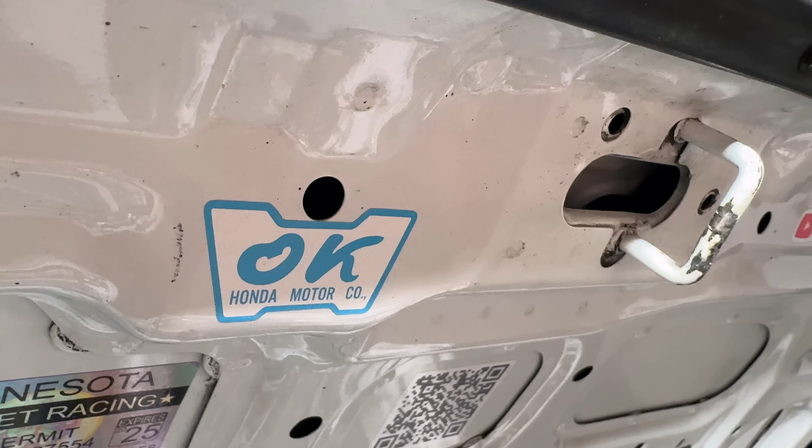If you've ever wondered what goes into building an all-wheel drive, K-swapped Civic, you've come to the right place. By the end of this heavily scripted video, you'll have all the specs, a full rundown of the work required to get it where it is today, and some of the things I've learned along the way. Plus, if you stick around to the end, I'll be pulling out the dyno graph, the corner balance results, and even a 60-second overview of the build sheet with all the juicy details. But first, let's dive right into this with a walk around.

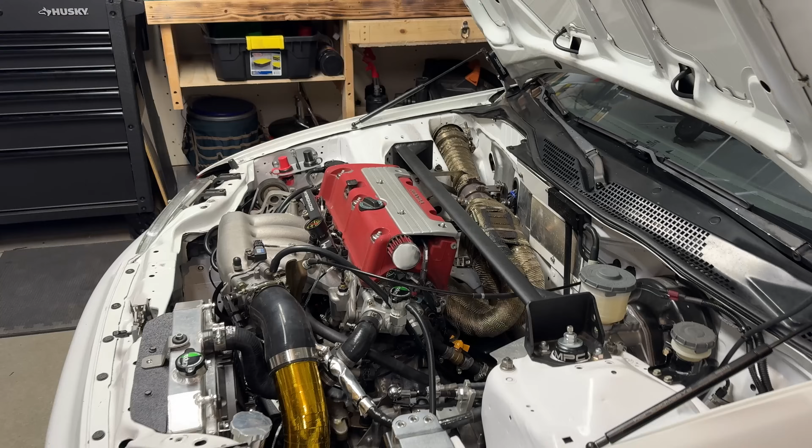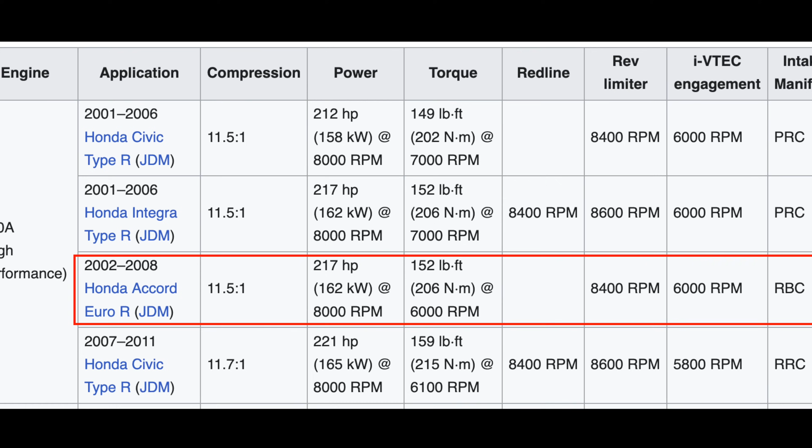This is a low-mileage JDM K20A imported from Japan by the well-known Honda importer HMO, who I'm sure most of you have heard of. This engine is found in the Honda Accord Euro R, otherwise known as the CL7, and produces 217 horsepower and 152 pound-feet of torque from the factory, which is just barely enough to torque the lug nuts on my truck. It's a stock block, top to bottom, nothing done to it other than regular maintenance, and I gotta say, when she gets up past 8,000 RPM, it's glorious.

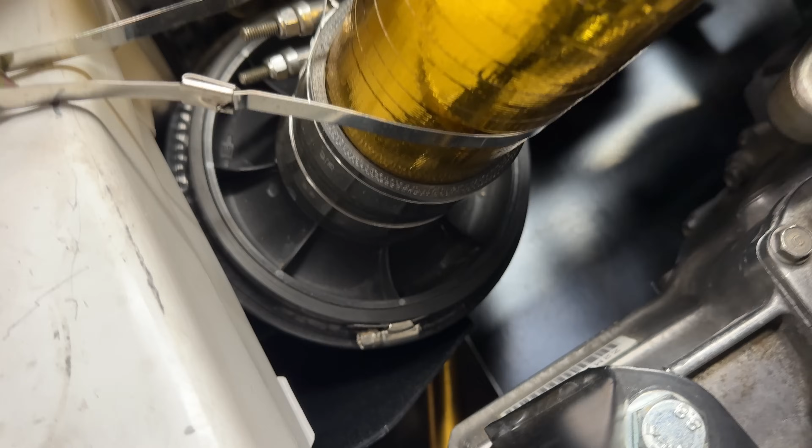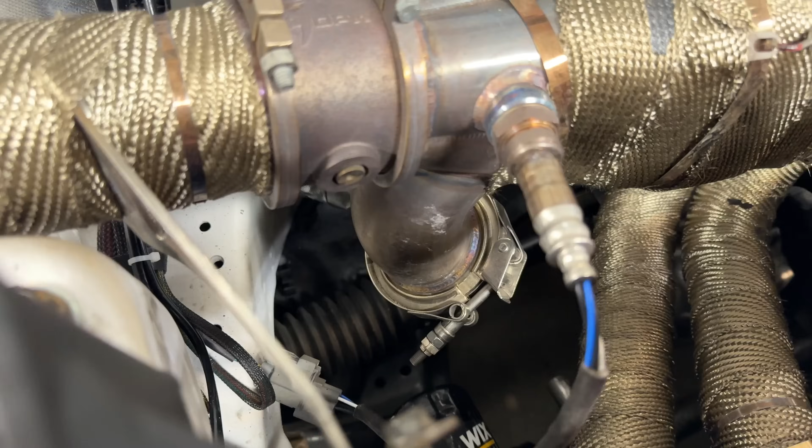Bolt-ons include a custom cold air intake I made out of 3-inch aluminum pipe, heat wrapped and capped off by a Blox 7-inch cone filter with a velocity stack. Exhaust is a Myers competition header, modified with a wireless control valve that tees off at the valve, which will eventually run under the car to a full exhaust. For now, it's straight out the fender, loud and proud. I did add a muffler insert to the dump pipe to take the edge off a little, but it's about as effective as a suppressor on a 50 cal, so there's that.

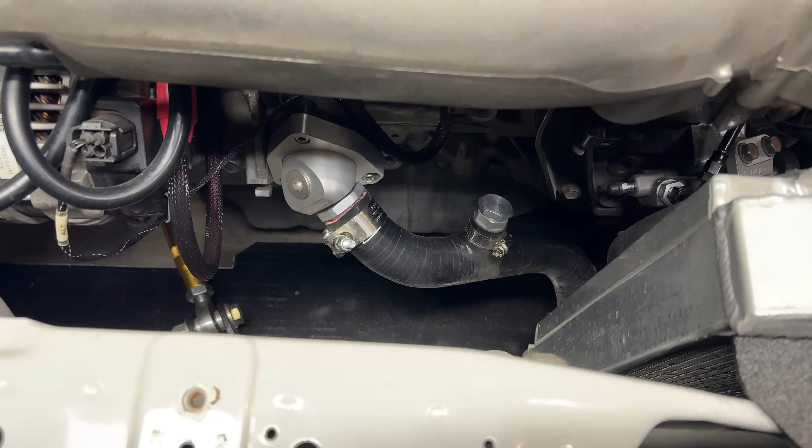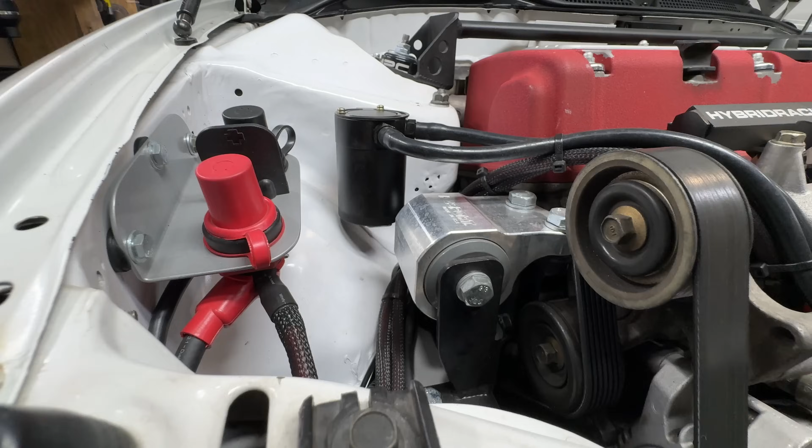For cooling, a K-tuned upper coolant housing and swivel thermostat, an old Yonaka half radiator with a SPAL fan and radium caps. I wired in a manual override switch for the fan for track days, which I'll show you when we get to the interior. It gets a little hot because I drive like a maniac, so I've got some cooling upgrades planned, but we'll get to that some other time. Other than that, I've got a basic catch can, hybrid racing center feed fuel rail and fuel pressure regulator, and stock injectors. But I'll get to the fuel system in a few minutes because there's a lot more to it you'll probably want to see.

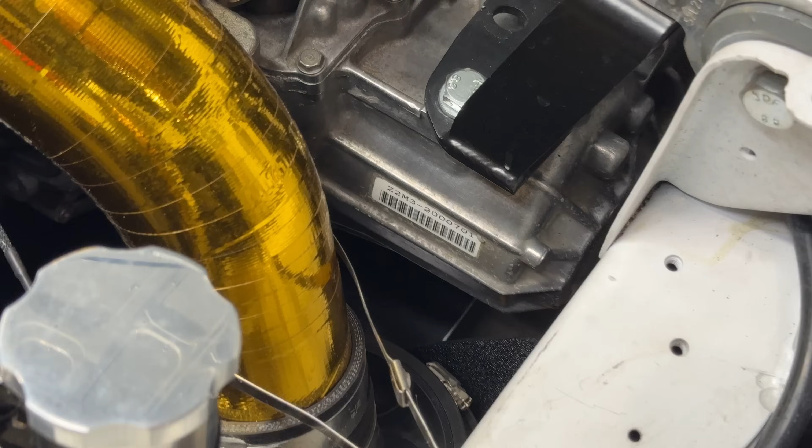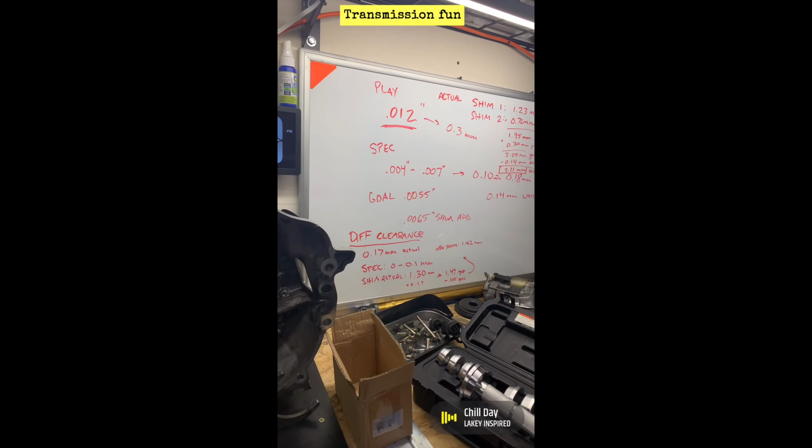Let's move on to the transmission. Just like the engine, the trans came from Japan, courtesy of HMO. It's a 5-speed CRV unit that I've done a little work to. It's been refreshed with new bearings and seals all around, Honda fluid, a Wavetrac LSD, and stiffer Speed Factory detent springs to help give me those nice, crispy shifts. Finally, it's got a stage 2 clutch and lightened flywheel from Competition Clutch to put the power down. That rounds out the engine bay for now, so we'll move on down under the car to the drive line and check out the all-wheel drive system.

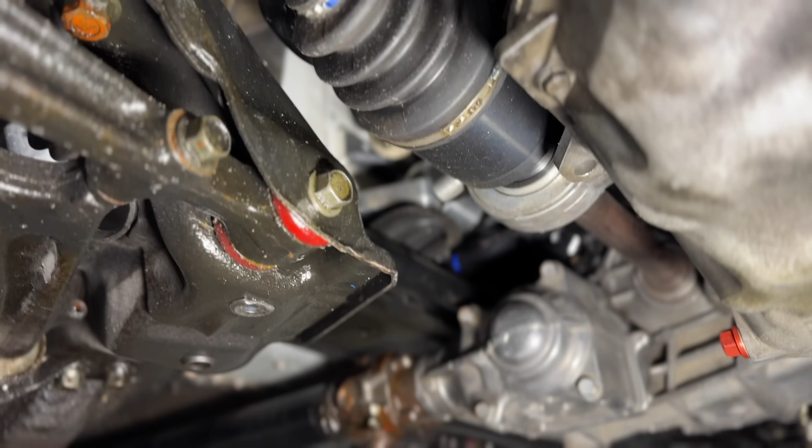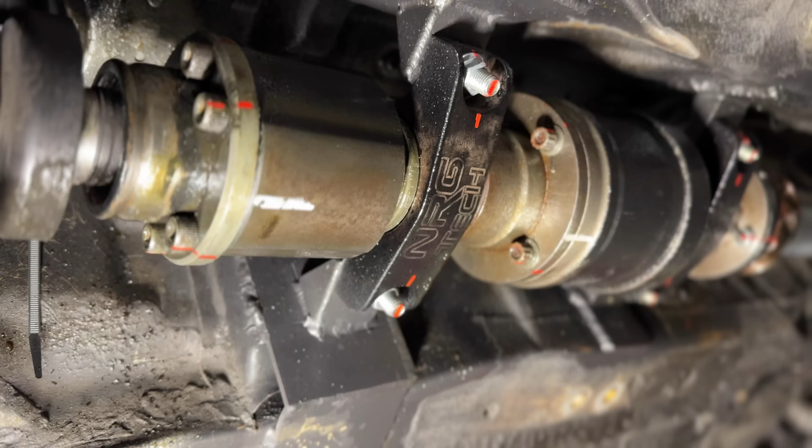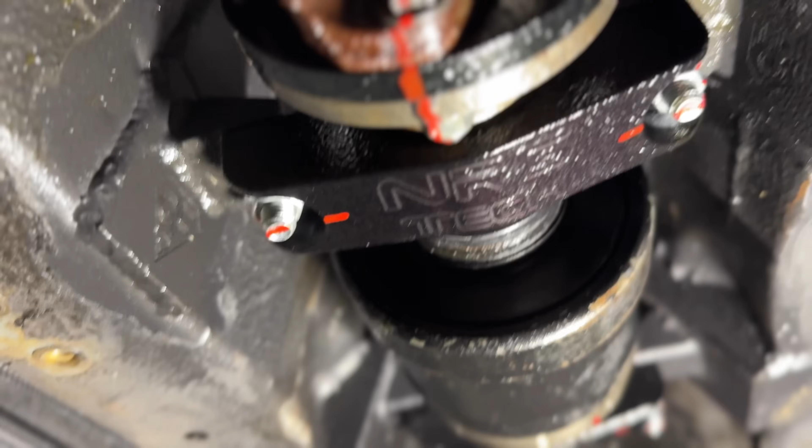Under the car, coming from the factory transfer case, we've got the front drive shaft with the slip yoke from a Civic wagon, which has just been shortened, upgraded to 1310 U-joints, and rebalanced. The viscous coupler is also from a Wagovan, rebuilt with 60K fluid by Trust Fab because who else? Viscous coupler mounts are a little unique. We've got Diamond Eye Fab weld-in brackets paired with NRG Tech mini mounts. I went that route because I wanted easy access for future maintenance. It's low profile, 4 bolts, and uses factory viscous coupler bearings. Looking back, I'd probably just do the S1 built mounting setup for cost effectiveness, but this works just as well.

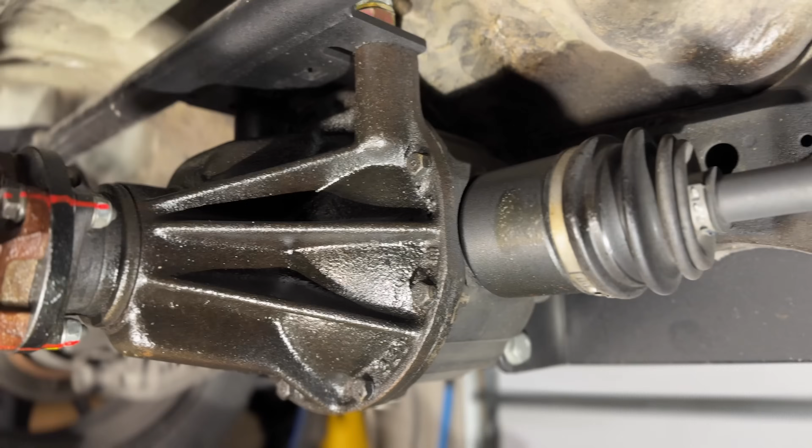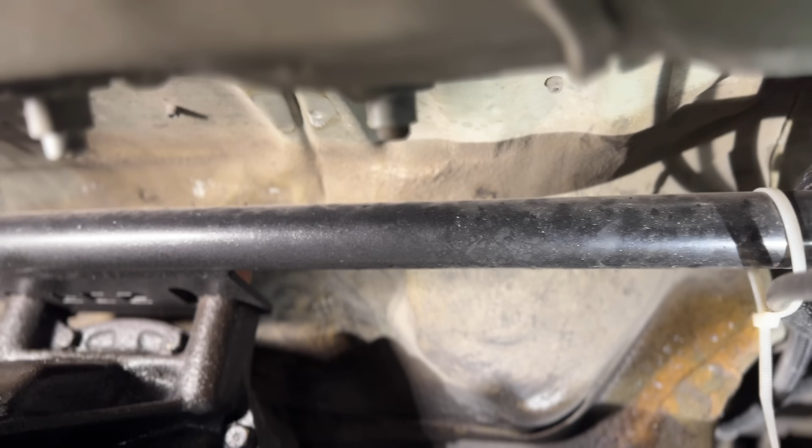The rear drive shaft was built from scratch with the same treatment as the front, 1310 U-joints, and a balance. It was just cheaper to build one new than modify the old wagon rear shaft. That brings us to the rear diff, which is a stock Wagovan unit, open diff, unmolested other than new fluid. It's mounted with the FCS Racing diff mount, which I chose because it was possibly the only true bolt-in solution on the market back in 2019, and I wanted to install it myself. I was pretty meticulous with the measurements and the riv nuts, and it's held up great, no complaints. The rear brace bolts did back out a little on me once, which isn't surprising considering how I drive the car.

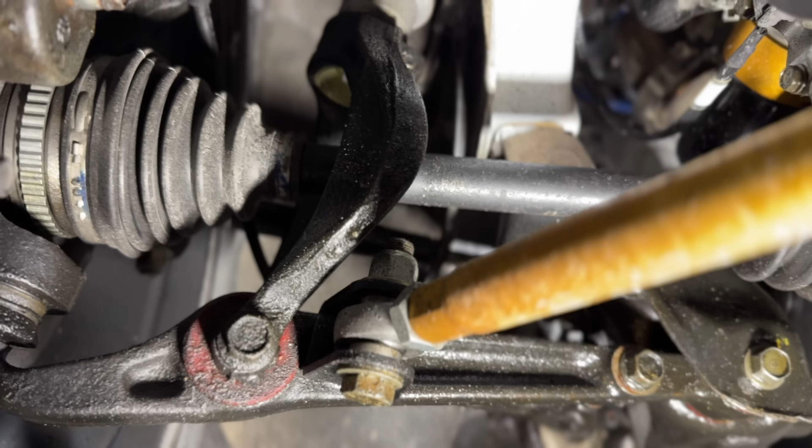So now I just use Loctite and don't have any issues. The axles are Insane Shafts 500 horsepower units on all 4 corners. For the rear trailing arms, we've got S1 Built Alpha 6 arms, which are awesome.

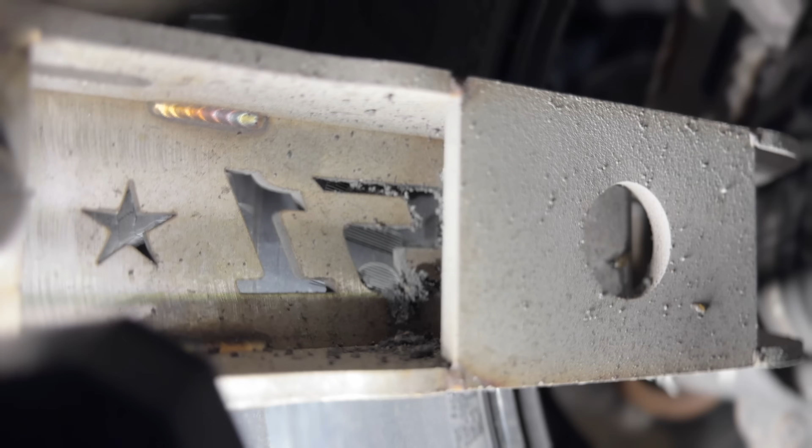I may throw on a 5mm spacer though whenever I put a new set of summer tires on, because 225s do scrape a tad on the inside. You can see some rubber there on the arms.

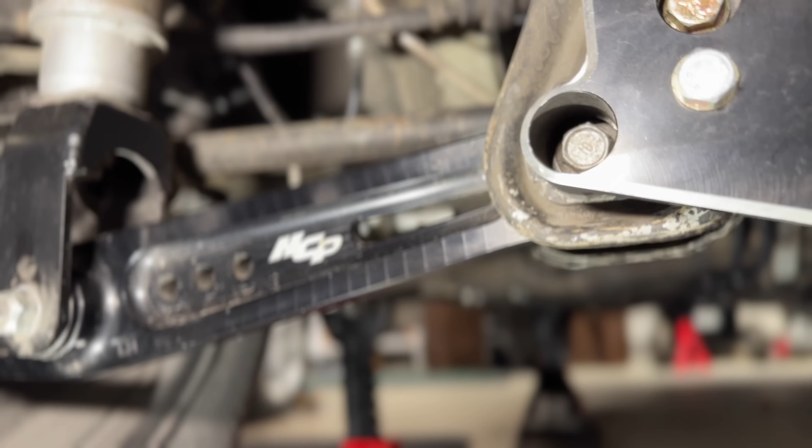Next on the list is suspension. Starting from the rear end, we've got PCI toe links, eBay camber adjusters, and HCP lower control arms. I kind of mixed and matched the all-wheel drive components back here based on the look I wanted, because I wanted to stick with the black theme for most of the parts.

Keep in mind, I started the all-wheel drive conversion in 2019 when the aftermarket support was still brand new for all-wheel drive swaps, so I was shopping around for a couple years as new parts were coming out. I had to modify the lower control arms a little bit to work with the S1 arms, but it's worked just fine. Coilovers are Progress CS3s with adjustable dampening.

Spring rates are 450 pounds per inch in the front and 550 in the rear. That's equivalent to an 8K 10K split front to rear in metric units, which is firm but very streetable. I could definitely go stiffer, especially in the rear, but this was the recommended starting point by the guys at Progress for my specific setup and use case.

The car handles pretty neutral and predictable in my opinion, tending toward understeer when the front tires get hot and squishy. There's just so much tire in the rear, I think I'm going to have to go full hard back there to get it to rotate more.

If I could use a skinnier tire in the rear, I would, but there are almost no performance options in a 205/55 profile, which is what I would need to use to maintain the same tire circumference as the front. So the solution will have to be suspension and differential related.

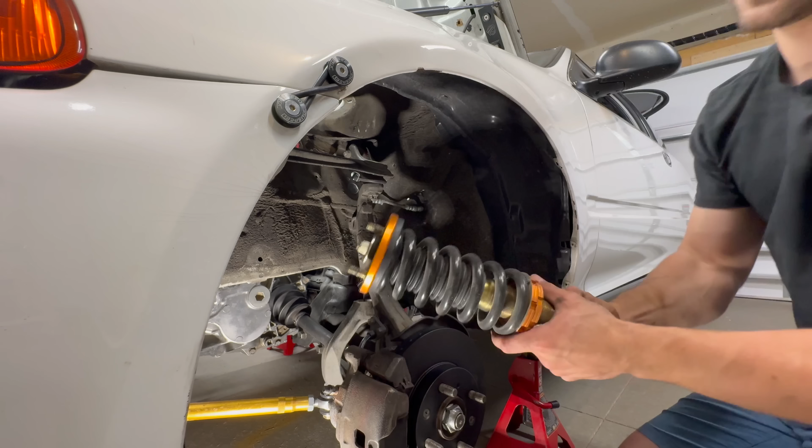My other main theory, speaking of differentials, is that the open rear diff isn't pushing me through the corners when the inside rear wheel lifts, and that's causing some understeer. I prefer a lot of oversteer, so I'll be testing different spring rates on the track eventually.

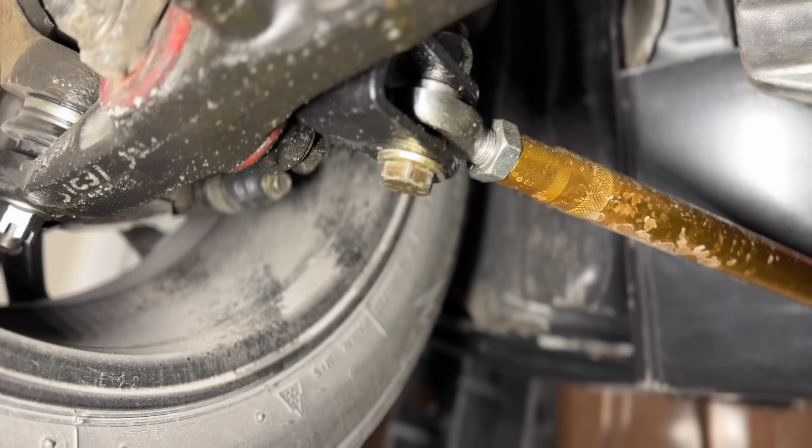No one I know of really road races all-wheel drive Civics. Everyone seems to be straight line drag strip focused, so there's not a lot of data out there yet about current setups. Up front, I've got Spoon extended ball joints, PCI adjustable outer tie rods, Full Race traction bars, and good old factory upper control arms.

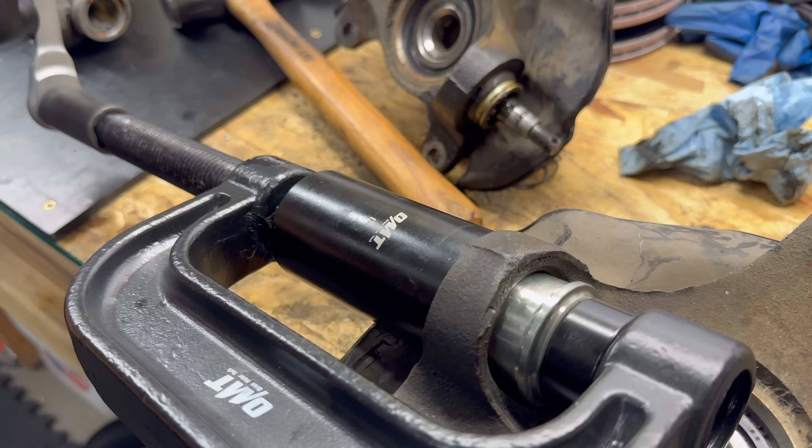I replaced the manual steering rack guts with a Quaife unit for a quicker ratio, which definitely improved the feel on the track. I did a whole video on that, so check that out here if you're curious.

I've been experimenting with different pads, but currently for the winter we've got Dynamic Friction Street Performance pads up front and Hawk HPS pads on the rear that just never seem to wear out. I've got DTC 60s for when track season starts up again, so I'm looking forward to using those.

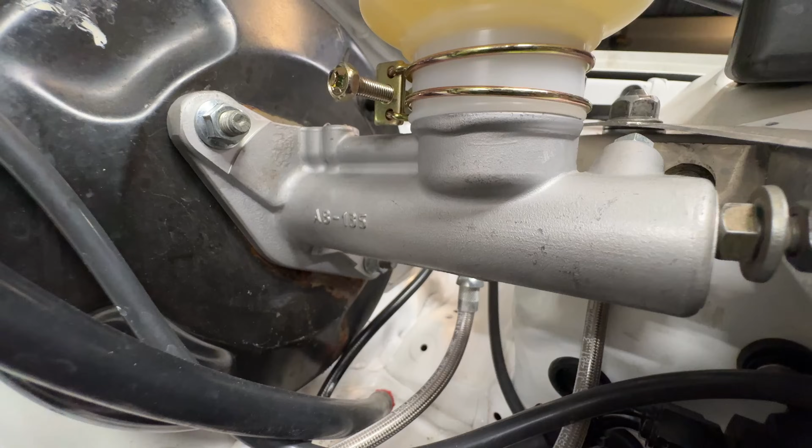There are no factory brake lines on this car. They've all been replaced with a full tuck braided line kit from Finishing Lines, which I really like. It simplified the whole system and really cleaned up the look in the engine bay and under the car.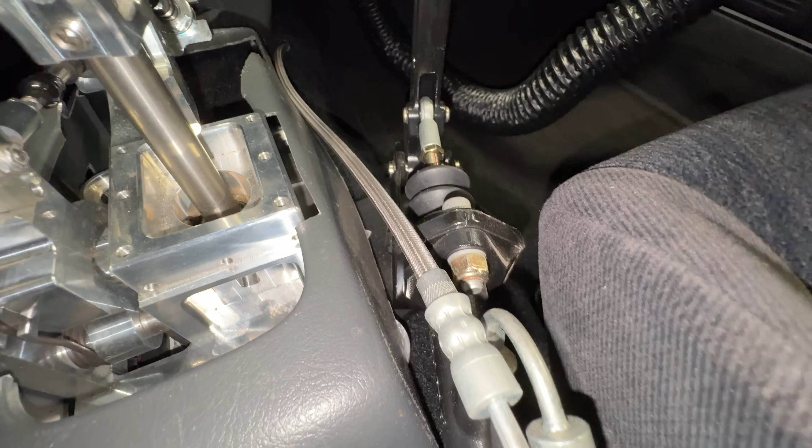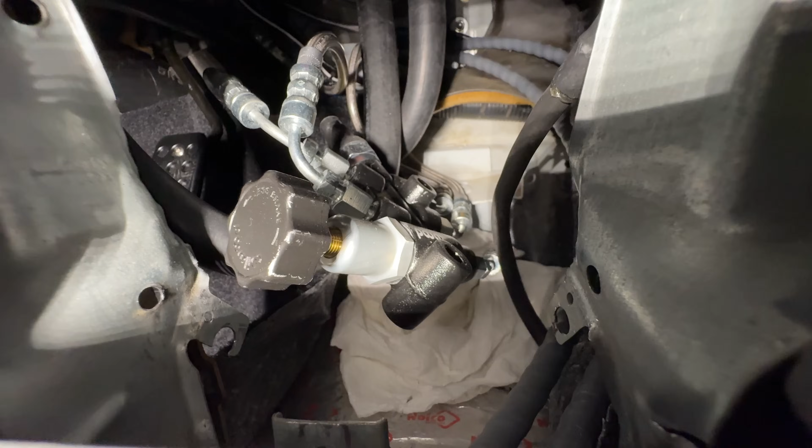I was running a factory 3030 prop valve until just recently when I started having awful brake performance on the track, and I couldn't even lock up the brakes. Turns out it was leaking internally, so I scrapped it and installed a Wilwood adjustable valve. The difference was just night and day, and now it stops like it should.

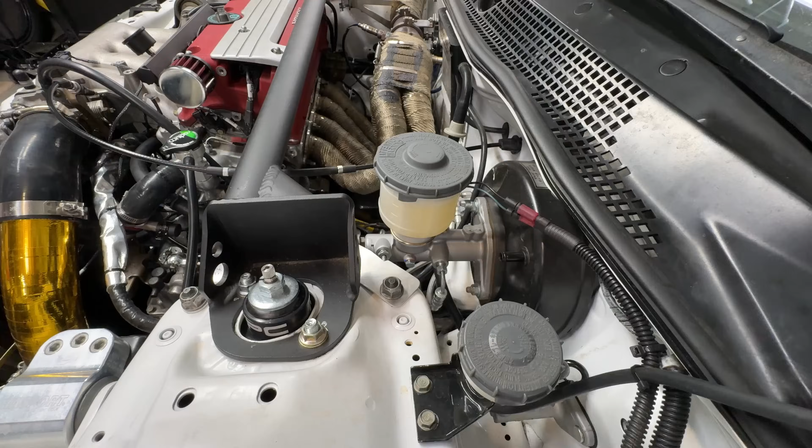I'm running with the brake booster disconnected because I like the feel of manual brakes, and it also counts as leg day if I'm at the track, so there's that. Running a bigger 15/16 master cylinder as well, which shortens the pedal travel, which I also prefer.

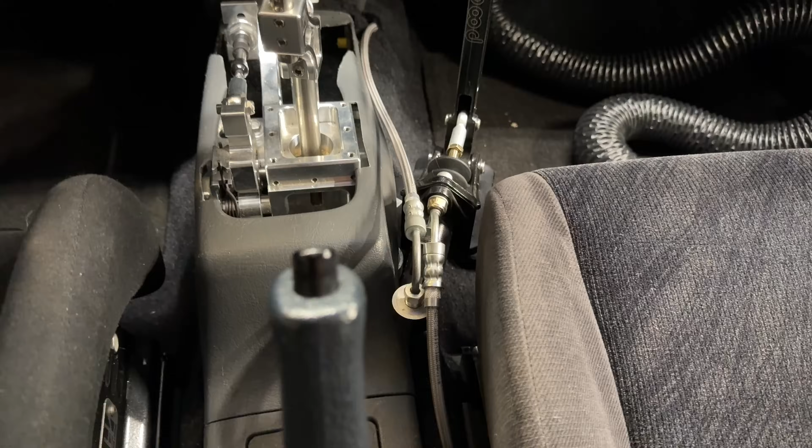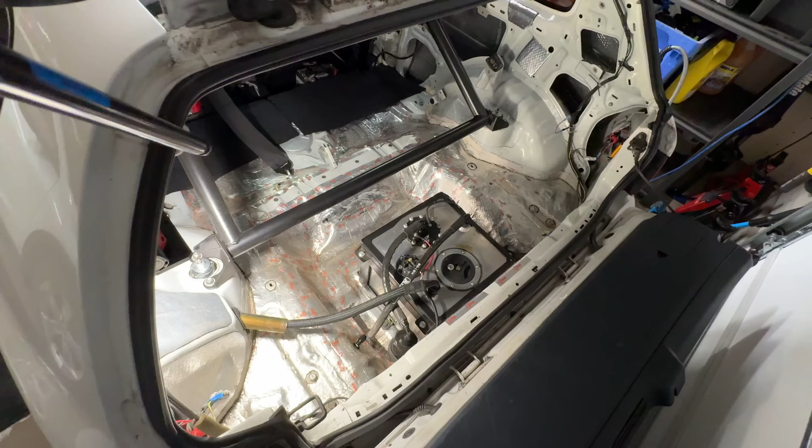I've plumbed in an inline hydro staging brake, which just holds the rear brakes. Not strictly necessary, but I like it for launching, and it comes in handy on the street sometimes when you stop on a hill. Let's pop the trunk and check out the fuel situation that I mentioned earlier. So back here we've got an Aeromotive 6-gallon fuel cell and its corresponding mounting bracket, which was not cheap.

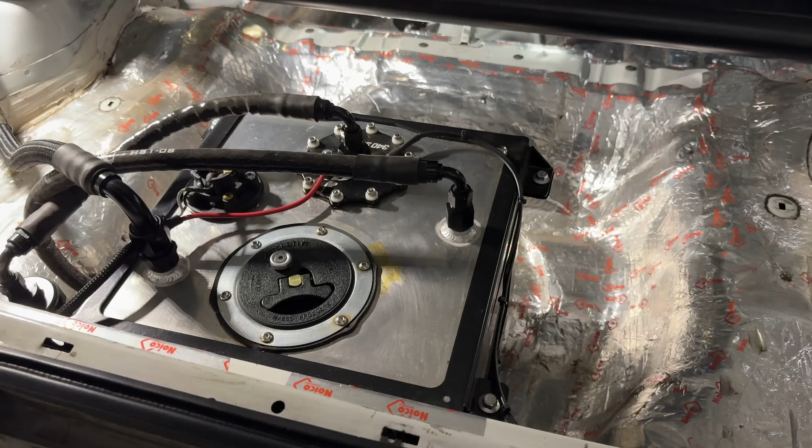But again, I don't have a welder, so I wanted a clean bolt-in option, and this was the best I could find. It's got an in-tank 340 stealth pump, which is really just stealthy enough to let you know you're in a race car without being annoying. I added a generic fuel level sending unit after the fact, which was the closest one I could find to being the correct height for this cell.

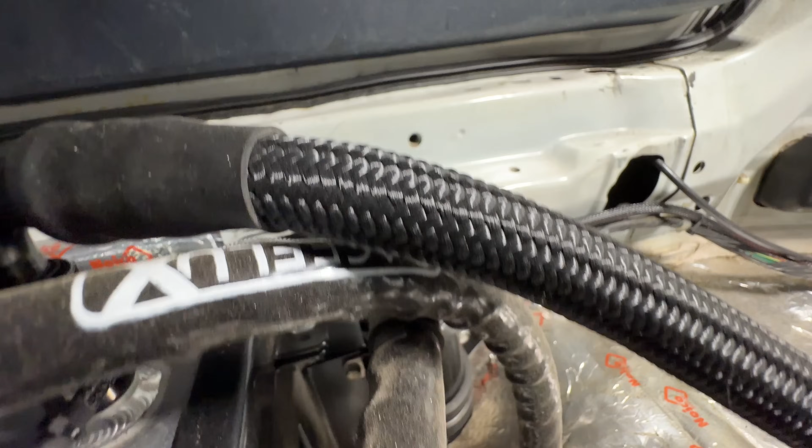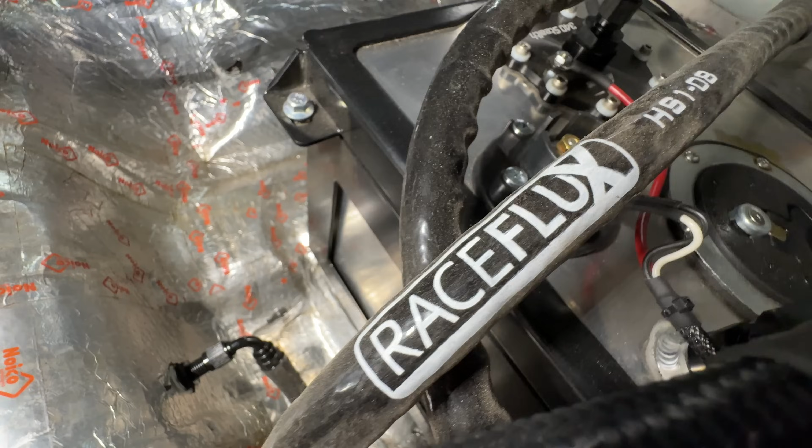We've got a Fuel Lab inline filter as a backup to the in-tank sock filter on the pump. All the fuel lines were custom made by a company called Raceflux. I planned how I wanted the lines run, mocked it up with rope, measured everything, then built the hoses online with their custom hose builder tool, which is really slick. It lets you choose a type of hose, length, type of fitting at each end, and whether you want a fire sleeve and shrink tubing. Highly recommend if you need custom hoses. It's one of the few pieces of this build that fit perfectly without having to make any modifications.

I do still have to pop the trunk to fill the cell, but now S1 Built makes a kit that uses the factory fill location, so eventually I'd like to convert to that. You're probably thinking 6 gallons sounds pretty small, and I agree, but it actually works just fine for what I use the car for. I don't daily this, I don't road trip it, I never really go more than an hour to an hour and a half away from home for car shows or meets, so it works just fine.

On track days, I take an extra 5-gallon gas can with me and I can run laps all day and drive 45 minutes home, no problem. I can usually get about 120 miles of range out of this cell on the street before I start getting nervous.

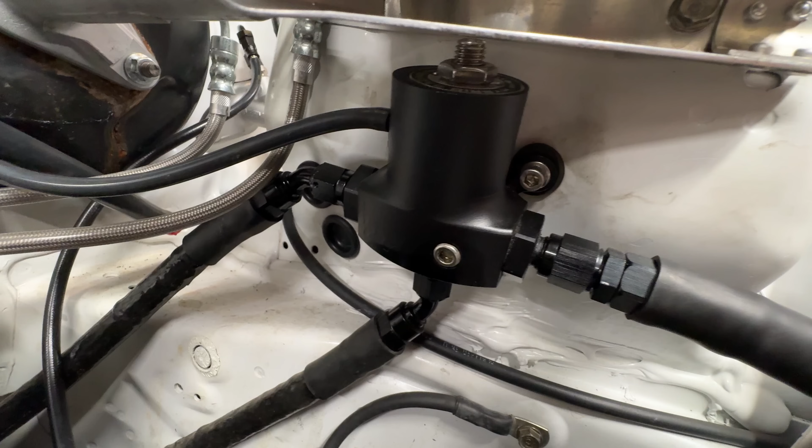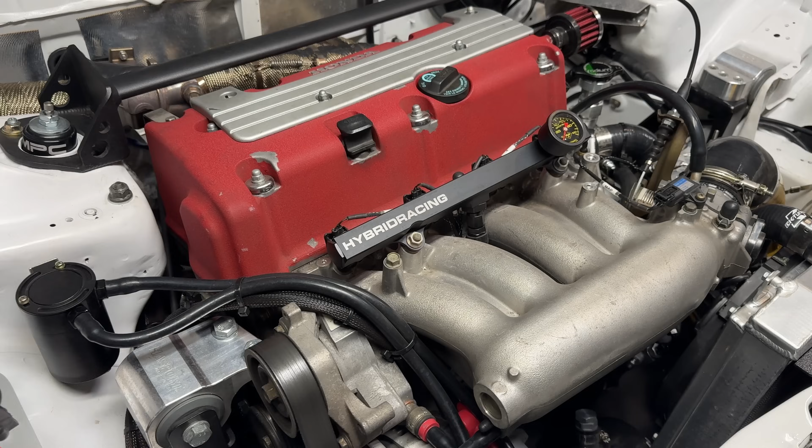The fuel pressure regulator is a piston-style unit from Hybrid Racing, as I mentioned before, and I run a deadhead configuration to the fuel rail, which just means the feed line dead ends at the fuel rail, and the return line comes off the regulator where it's mounted on the shock tower, instead of mounting on the fuel rail. No advantage there other than packaging and looking really clean. I just didn't want a fuel line running around the belt side of the engine since that would have complicated the routing and used longer lines. The way it is now uses the shortest possible fuel lines.

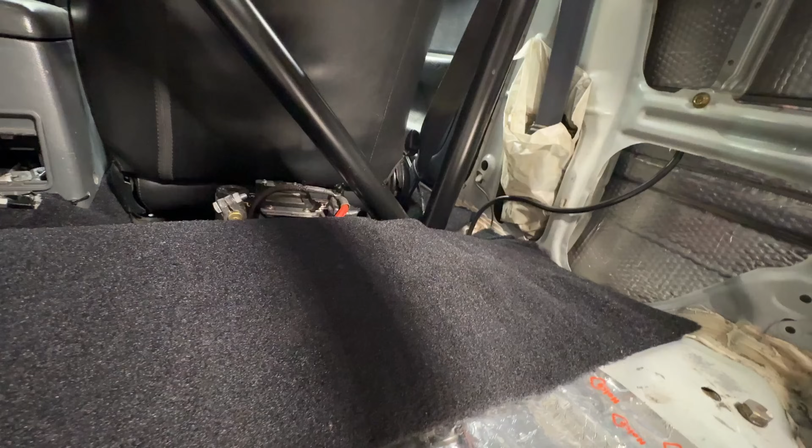Okay, let's check out the interior. So the first thing that probably stands out is this roll bar, which is from Eimer Engineering. There are really only 2 mainstream options for bolt-in roll cages for this chassis, and those are Cusco and Autopower. But I didn't really like either of their available options. This is a 4-point bar, powder coated in a semi-matte black finish, which they let you choose from a whole catalog. I did a whole install video on this too, so go check that out if you're interested in what it took to install. It was a little tricky. I also added a little fire extinguisher here just in case things get too rowdy out on the track.

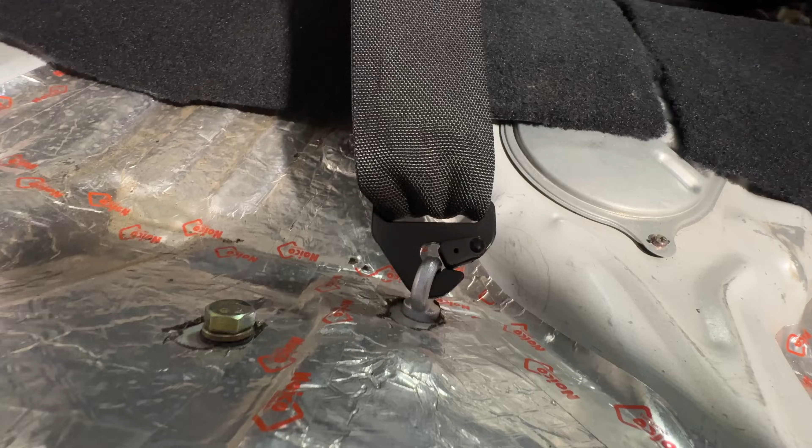The seat is a Sparco Grid Q on a PCI slider mount with a Sparco FIA 4-point competition harness. It took a little finagling to figure out the harness mounting on the center console side of the seat because there's no room over there to mount a ring to clip the harness onto. So I customized that side of the lap belt to use a bolt-in bracket instead of the clip-in style.

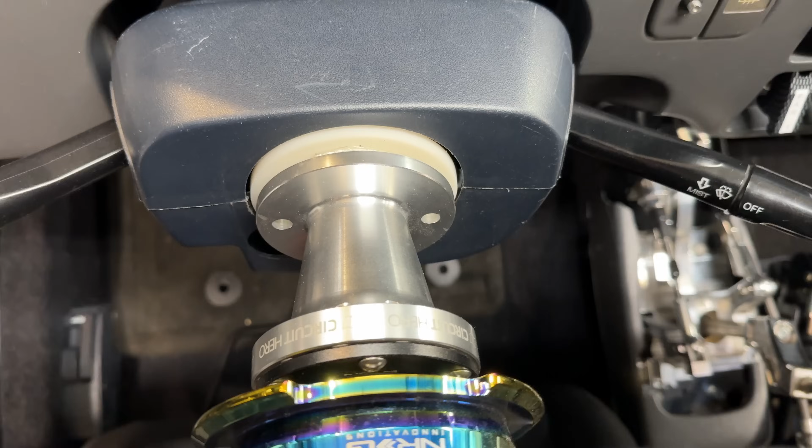Sticking with the Sparco theme, we've got quite literally the very first upgrade I ever did to this car, which is the Sparco R383 steering wheel, which I still love. It's on an NRG Shorty quick release in neochrome with matching neochrome mounting screws because that's what I wanted back in 2015 when I didn't know anything about cars.

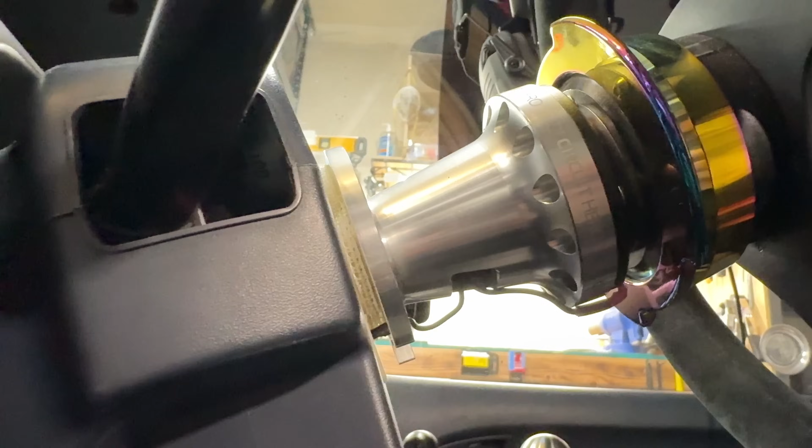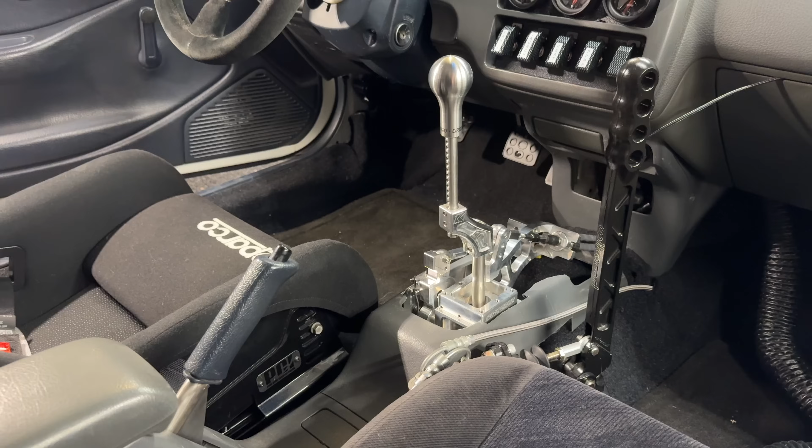I recently added a Circuit Hero steering wheel extension to bring the wheel in closer to me, which makes tracking the car way easier and has the added benefit of allowing me to see my gauge cluster again. Over in the middle here, we've got the K-tuned billet shifter and cables. I've seen a lot of mixed reviews from people on these, but I spent a lot of time adjusting this to get it just right, and I absolutely love it.

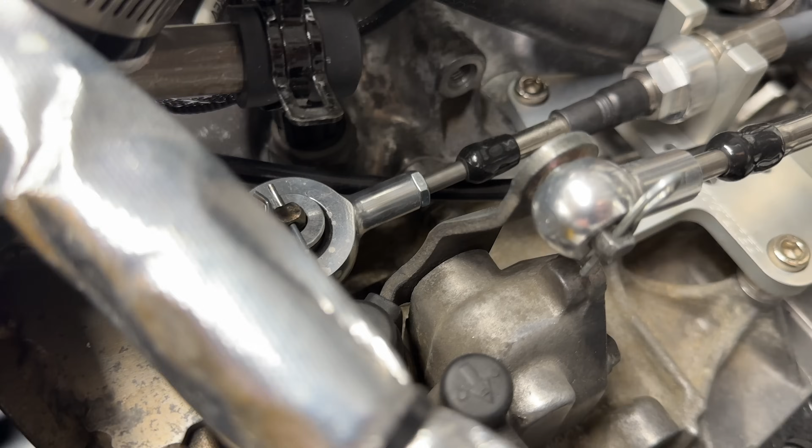I've got it set to the shortest throw setting, and combined with the stiffer detent springs, it just feels so rock solid and crispy. I was missing some shifts at the track every once in a while with the old Mugen shift knob I had, so I swapped in a Circuit Hero weighted knob and it changed my life. It's really the perfect combo right now in my opinion.

For gauges, I made a custom mount panel from 1/8" ABS plastic and added coolant temp, oil pressure, and fuel level gauges from GlowShift. The factory fuel gauge on the dash just isn't accurate enough with the aftermarket fuel sending unit, and when you only have 6 gallons in the tank, you kinda need it to be accurate.

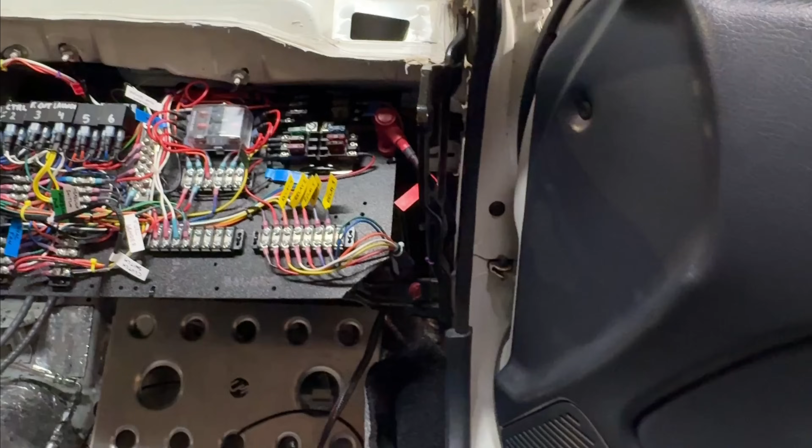Rounding out the interior, we've got this custom switch panel I made. Each switch controls a dedicated relay that I wired to a custom electrical panel I made and installed behind the glove box. Obviously, the radio and HVAC controls have been removed, along with the factory heater core and blower, which took up the whole space under the dash and never got used anyway.

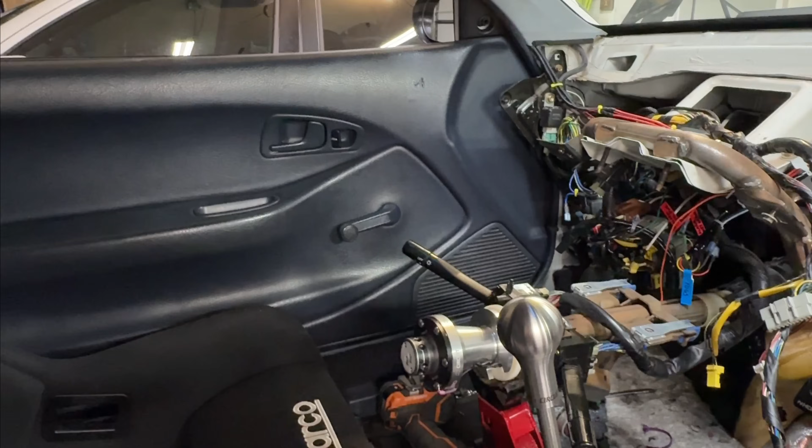I've since added an aftermarket heater core with a SPAL fan and run some flex tubing to the factory dash air inlets, so I can run the car in the winter and have defrost and some heat. I did this because I recently started ice racing. It's a super simple system that hardly takes up any space and weighs a lot less than the factory system.

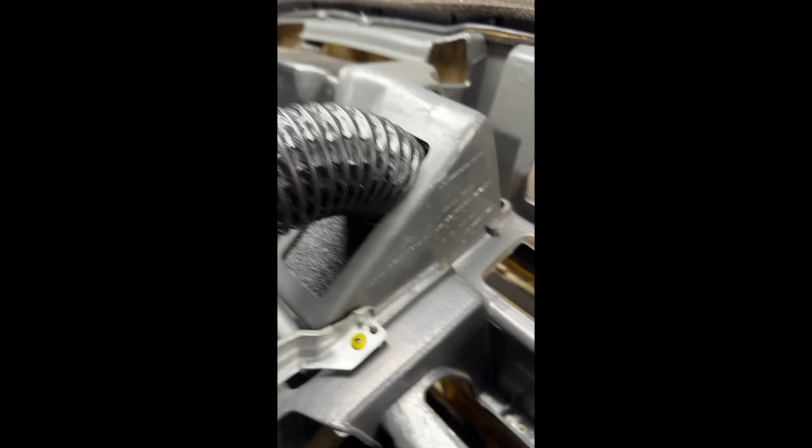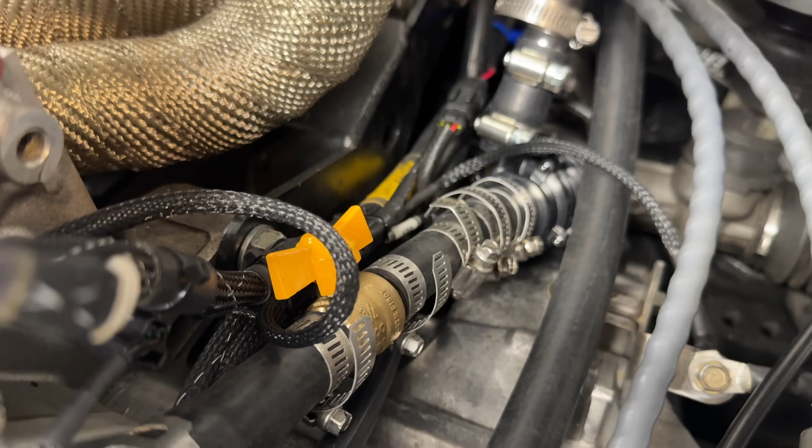I did have to add a booster pump to the coolant line that runs out of the head to the heater core because there just wasn't enough flow to keep the core hot without it, so that's controlled by one of the switches here too. In the summer, I can close the manual shutoff valve on the supply hose to prevent coolant flow to the heater core and still use the fan for air circulation when it's hot. The car never had AC anyway, so at least I'll have some airflow in the summer.

There's just a few more things on the exterior before we get to the dyno sheet and the weigh-in, so let's check that out real quick. The winter wheel setup is these black Sparco Terras in 15x7, which I've always wanted to see on this car. I scoured the internet and I have yet to find a single photo of an EG on these wheels. I saw a couple of 8th gen Civics and Honda Fits running these, and I found the front half of an EK and a CRX with the logos removed, but that was the best I could do.

Otherwise, this might be the only EG on the internet running these wheels, and I'm not sure why, because I think they look awesome. But wheels are all about your taste, so maybe I'm alone on this one. I'm running Blizzaks on these for the winter in 195/60 R15s.

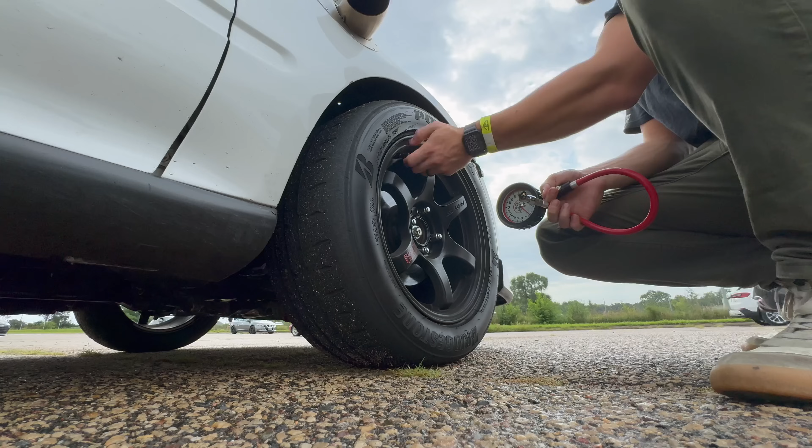With the factory Honda mudguards, I think this setup goes pretty hard, but let me know what you think in the comments. The summer setup is pretty standard, matte black, Rays Gram Lights in a 15x8, wrapped in Bridgestone Potenza RE71 RSs. Since it's all-wheel drive, we're running 225/50s all around, which is basically the widest tire you can run in the rear and results in some pretty insane grip levels on the track.

Let's take a peek up front where we've got some Auxbeam driving lights I just installed, which I of course had to wire to a factory style fog light button on the dash since I had one laying around. Even though I'm running nice Sylvania bulbs, the headlights just don't put out the kind of light I want at night, so I figured I'd do some big yellow rally style fogs.

We've got a Sparco tow strap, and I did these bumper block off plates to help prevent road spray from getting into the engine bay in the winter, but otherwise this just runs wide open in the summer. It just helps the engine heat up quicker when it's below freezing here. Obviously, this has to come off when it warms up, but it runs perfect in the winter just like this.

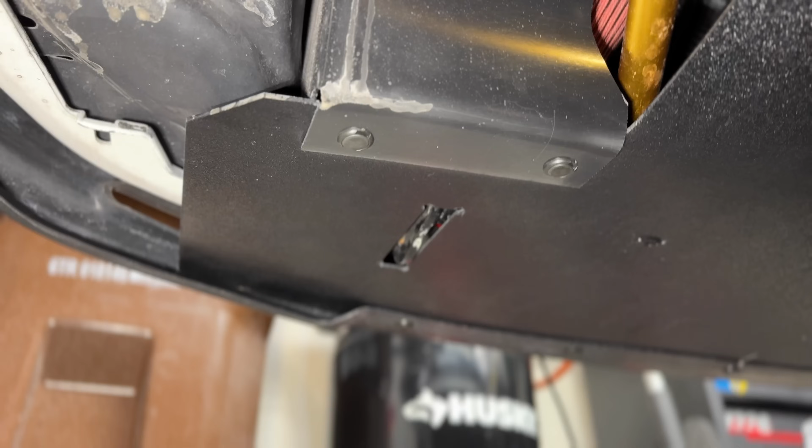I recently did a custom under tray too, made of 1/8 inch ABS plastic sheet, as well as an air filter block-off plate to help protect the bay and the filter from road spray. Since the filter is so close to the ground, it'll suck up water and try to drown itself if I hit a big enough puddle or if it's raining too hard. If you want to see what that looks like, check out this video in the corner. I just about hydrolocked it during a competition and it almost ended really bad.

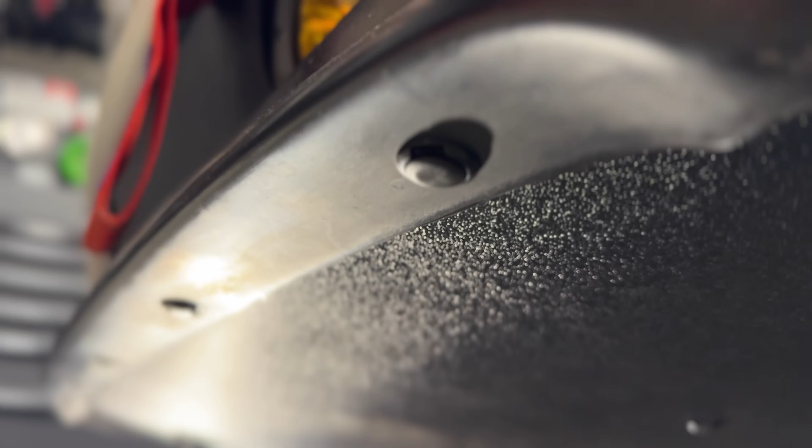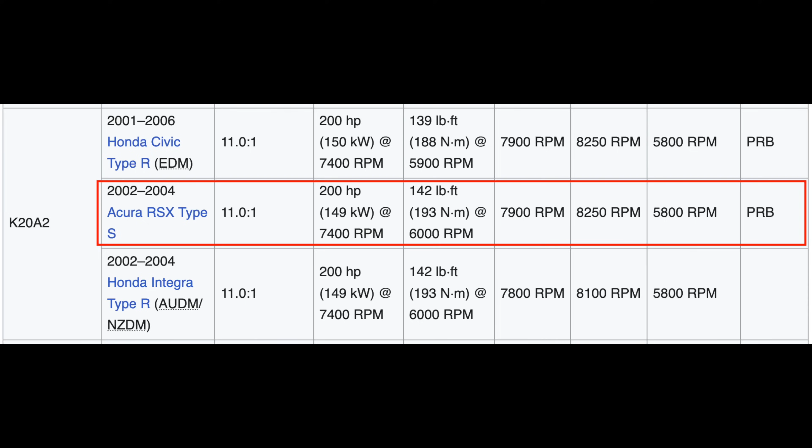I assumed there would be more drivetrain power loss with the all-wheel drive system, but I think the torque number is kind of where you see that loss. 134 torques is more like K20A2 territory, so at least I have a little buffer with the higher compression K20A.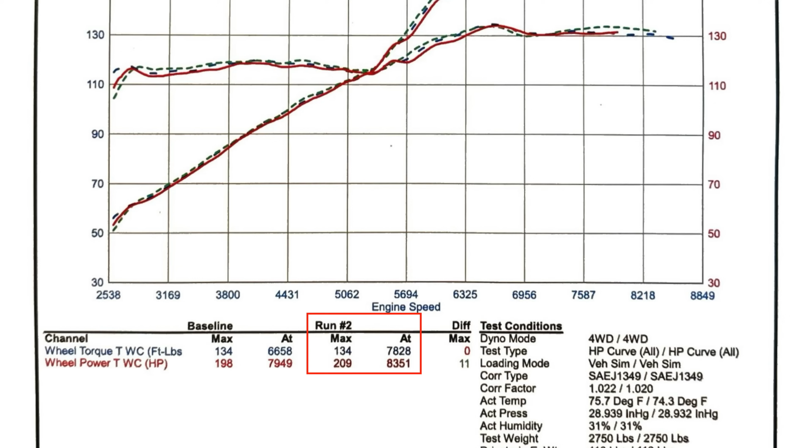This engine in factory form puts out 217 horsepower according to the interwebs, so I think 210 wheel is pretty good. As you can see, my tuner cut it just under the 8,400 RPM limiter to be safe, but the power curve shows no signs of stopping, so I don't think 217 is unrealistic with a little bit higher limiter.

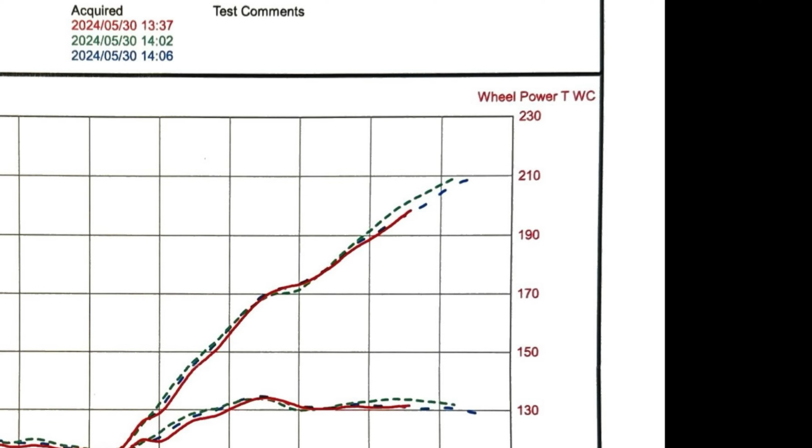Yeah, they made 210. Granted, I don't know if that 217 Euro R number is crank or wheel horsepower, so if you know the answer, maybe throw it in the comments with your source. I'm always curious about that stuff.

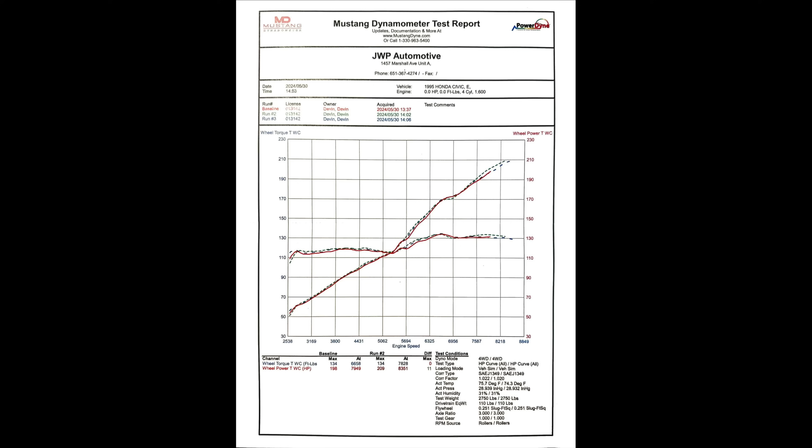I don't have torque split numbers available from the dyno since it was a single eddy current Mustang roller, so you'd need a dual eddy current dyno like a Dynapack to measure torque at both the front and rear wheels separately. If you know of anyone who's done that, let me know in the comments. Myself and probably the rest of the internet would be super interested to see the power split.

Now let's check out the weigh-in numbers. I had the car weighed by Impulse Performance, who brought their scales out to a track event. With a full tank, it came in at 2,311 pounds, which is still 50 pounds lighter than a stock Civic Si, so it certainly still handles like a lightweight.

The weight distribution comes out to 63% front, 37% rear, which is a little more balanced than a K-swap in front-wheel drive configuration, since you have the extra all-wheel drive weight in the rear, so that's nice. In fact, the weight distribution of a factory spec Civic CX is 62 front, 38 rear, so mine is nearly identical to the original spec. The crossweights are decent at 52/48, but I'd like to get those dialed in a little better.

Last but not least, here's the full parts list with every single aftermarket and non-stock part currently installed on the car. I've made this list public and linked to it in the description so you can peruse it on your own time if you're interested. I've included the totals for both parts and labor, but just know that some of the labor isn't totally necessary for an all-wheel drive build.

One thing to note when looking at this list is that I got the rear differential and viscous coupler essentially for free. When I first started the build, I bought an entire RT 4-wheel drive Civic Wagovan for a steal, removed the parts from it, put a little TLC into it, and resold it in front-wheel drive configuration for essentially the same price. So you'd need to add $3,000 to $5,000 to the parts list to make it accurate for today's obscene prices on wagon parts.

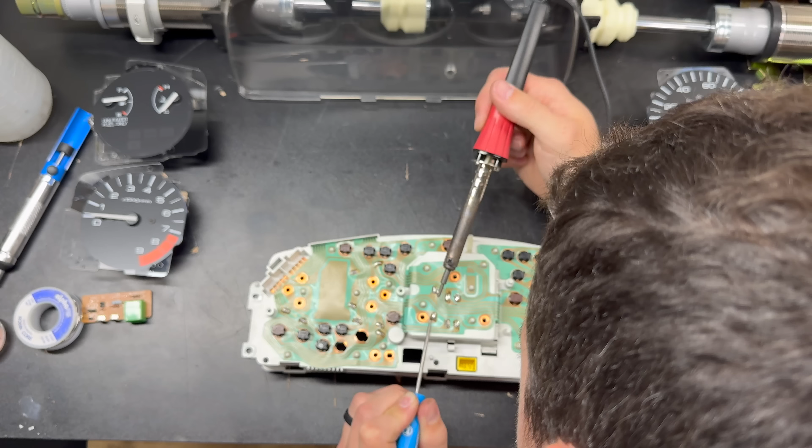All in, we're looking at a little over $30,000 in parts and about $8,000 in shop labor for things I couldn't practically do myself. So to get it where it is today from scratch would take well over $40,000, not including the price of buying the car in the first place. Considering the fact that this is a very middle-of-the-road build, looking at this list certainly puts into perspective the exorbitant amount of money some of these higher-level builds require. It's not the cheapest way to build a Civic, but it's also certainly not the most expensive either.

If anything, keeping track of the costs reminds me just how far this build has come in the past decade, and getting out there to see other people's builds always makes for an exciting but humbling experience. And the thing is, the price doesn't matter so much at the end of the day because for true enthusiasts like you and me, it's all about the experience. If someone came up to me today and offered me $40,000 for this car, I'd have to say no.

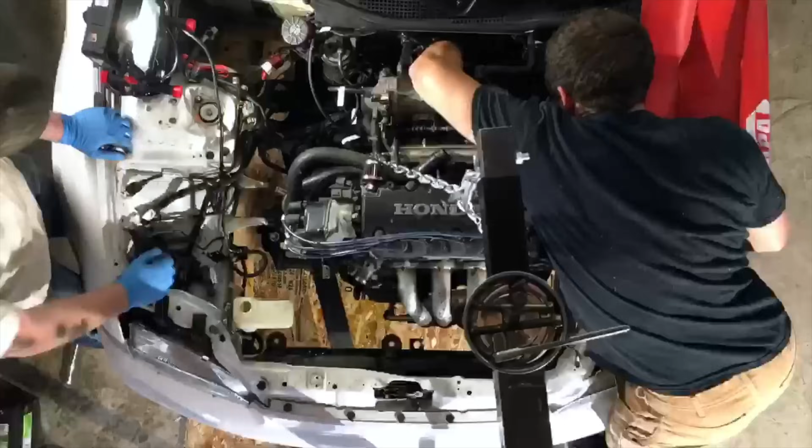So that brings us to the last thing. If you're trying to build an all-wheel drive Honda, or any car really, and you're a little overwhelmed by the price or the complexity or just how long it's taking, or feeling that FOMO when you see other people's builds, just remember, it didn't get built all at once. It's taken me nearly a decade to build this car, which comes out to just over $300 a month. So if you're just starting or you've been grinding on it for years like me, I just wanted to say, keep it up. The car enthusiast world needs you.